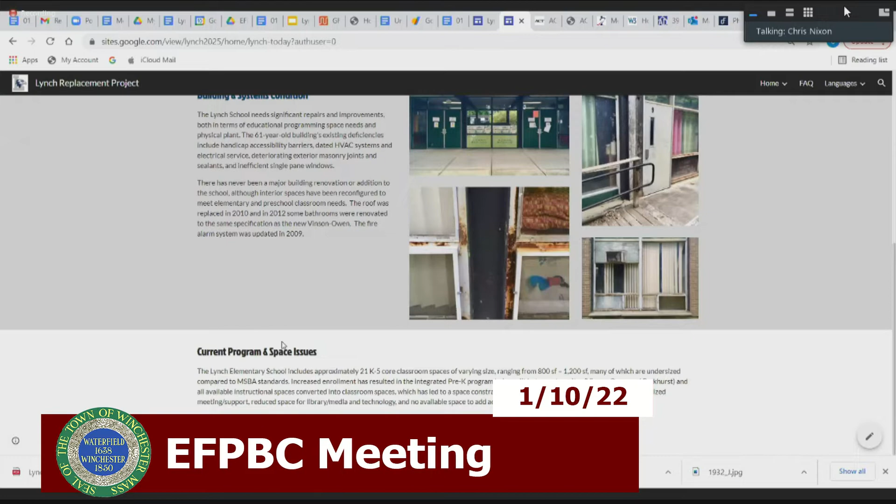We next have a page that describes what Lynch is today. It was designed as a junior high school from the very beginning in 1960. So there's a description of how the current school was intended, its size, and its overall condition with respect to the building and building systems. We also briefly describe some of the program shortcomings we have at Lynch, most importantly because it was never designed as an elementary school to begin with.

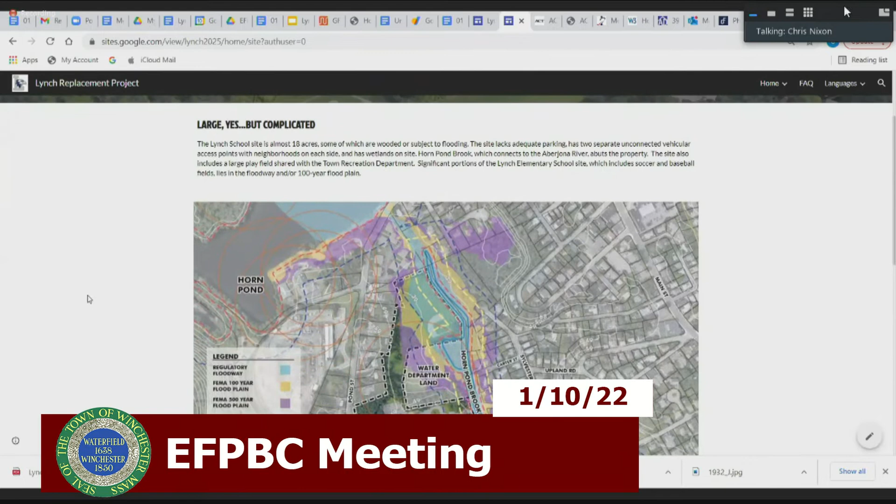This is an interesting page that many people will be interested in—the site. It is a large but complicated site. We're adjacent to Horn Pond Brook, and we have setbacks required because of the floodway, floodplain, and conservation issues and restrictions here.

Really the elephant in the room is this huge chunk of the site that's not ours—this is not school department property. What you see labeled water department land was in fact a well field built in the late 1930s in Winchester and used until the late 1950s, until we submitted an agreement with the MWRA. So it's not our land, but our Tappé design team determined pretty quickly that if it was our land, it might present some unique planning opportunities.

For the public who didn't already know, at the last EFPBC meeting on December 20th, the committee formally requested the school committee explore a land transfer agreement with the select board, under whose authority this land sits today, even though it's an abandoned well field. There are 25 or 26 abandoned drinking water wells on this property. The school committee heard that request, we've discussed it, and we look forward in the next couple of weeks to having that conversation with town management and the select board. That'll be important for us moving forward.

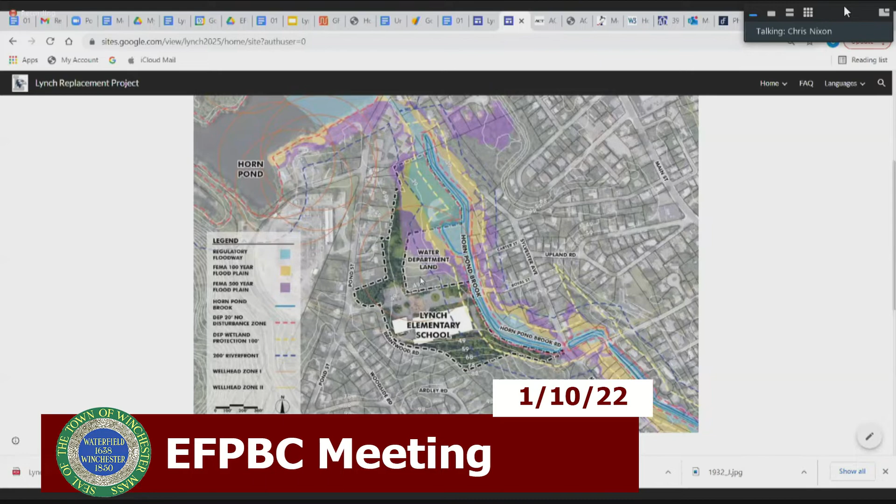If there is ultimately a preferred scheme—and Charlie will certainly dwell on this a bit more in tonight's presentation—for the new Lynch that in any way relies on that land, it needs to be our land by the time the board votes the approved preferred schematic in September. And the final step in making that land transfer involves town meeting, so this is going to be, very quickly, a critical path item that may come before spring town meeting.

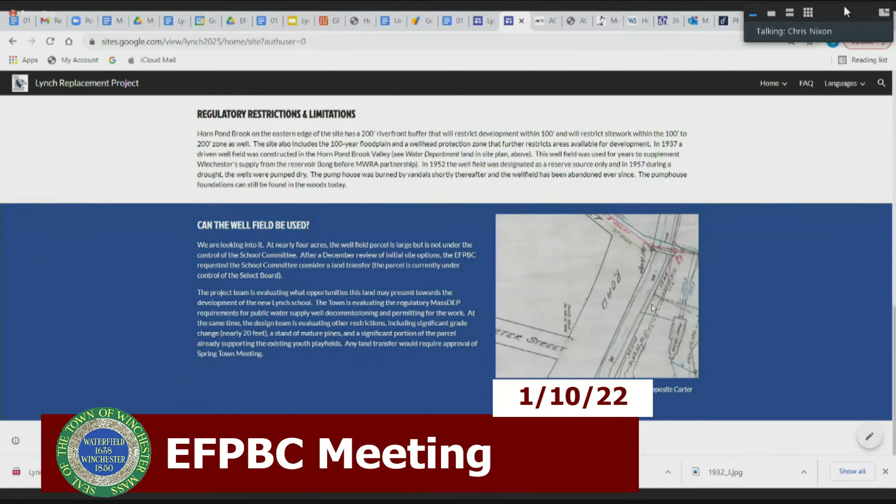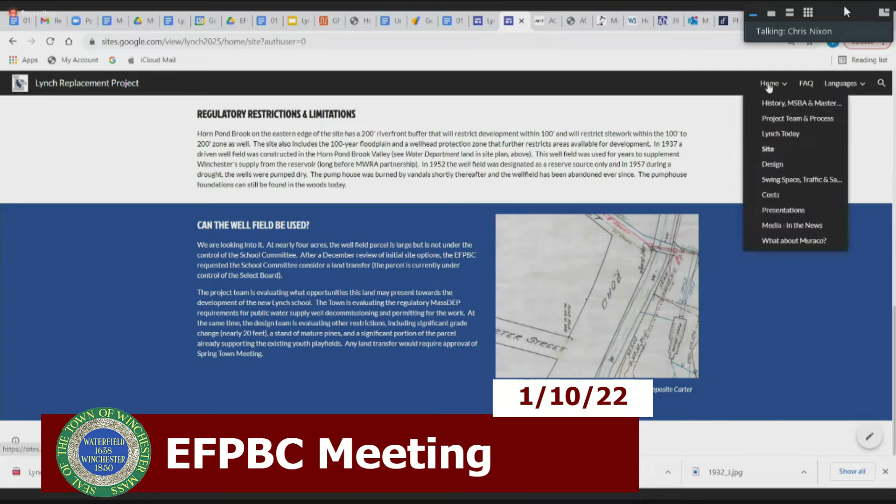For those who live in the Lynch neighborhood and care to go looking for it, the foundation of the old pump house is still there today in the woods. I think we will continue to update this blue field with time when we have more information on how the conversation is going with respect to land transfer.

Then we're going to go to a design page. Obviously there's a lot of information yet to be posted because we're only just coming out of the starting blocks with Tappé. But here you can see a reframing of some of the conceptual design ideals the MSBA is looking for, and some of the key metrics that we'll be evaluating as we consider these different options.

We also described some of the key project goals that were actually published in the project RFP. That includes our recognition of Winchester's climate action plan, adopted back in 2020, and the school committee certainly is expecting a LEED certified building. So that's important to us as well. But look for much more information here on the design page.

There's been much conversation about swing space for the Lynch project. Swing space is just temporary space that accommodates students during construction. Here you see a description of the short and long-term benefits of swing space. We have a little history page here about how swing space has been used on all three of the last major school reconstruction projects. With swing space, we actually moved the students from the Lincoln, Ambrose, and Vinson-Owen schools completely off-site for construction.

And inevitably, we often get questions from the community about what and where is Parkhurst, which comes up in conversation as a potential swing space destination. So there's some history here about that building, as well as some language about our future traffic and safety concerns as the project moves forward.

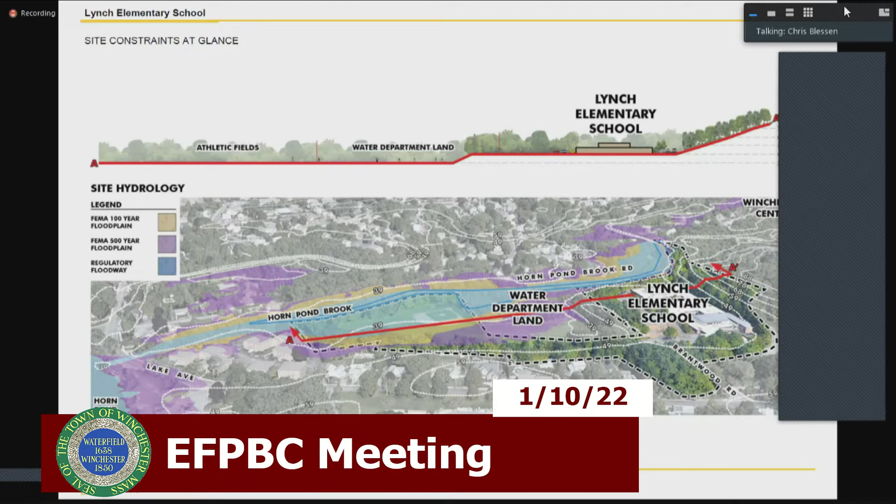And the survey team's out there right now investigating that and trying to get some more info to add to the PDP submission. So the first option was the renovation option here.

What we've added to these is primarily in the middle column, between the image and the description on the right. On the ones we carried forward from the last meeting, we started to add a first floor concept idea where you can see what the first floor is doing. Right now isn't the critical moment to talk heavily through architecture or arrangement, as we've just started to touch the iceberg on those ideas, and we'll have more to discuss at the next meeting in terms of education and how these buildings, these different schemes, lay out. But for now, we're talking about the first floor concept and how that builds, because it has implications for the grade configuration, which is the second note below the floor concept.

So in reality, the renovation scheme, as one might expect, produces no change to how the building is configured currently.

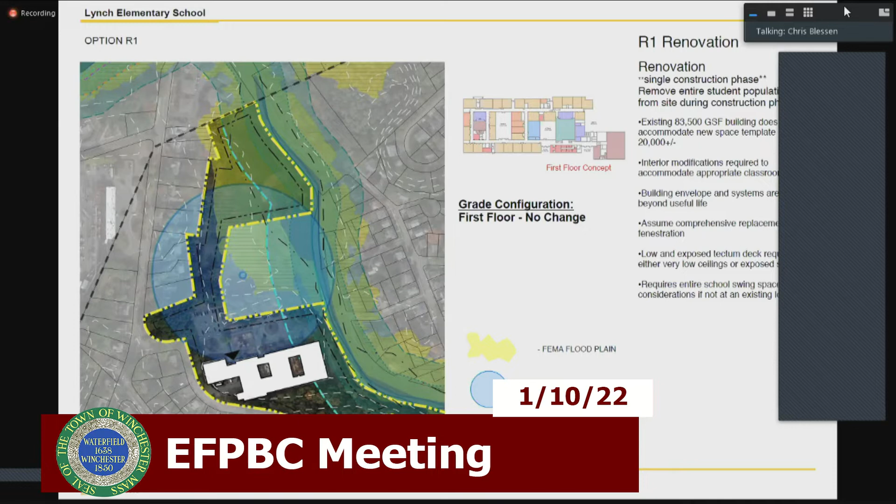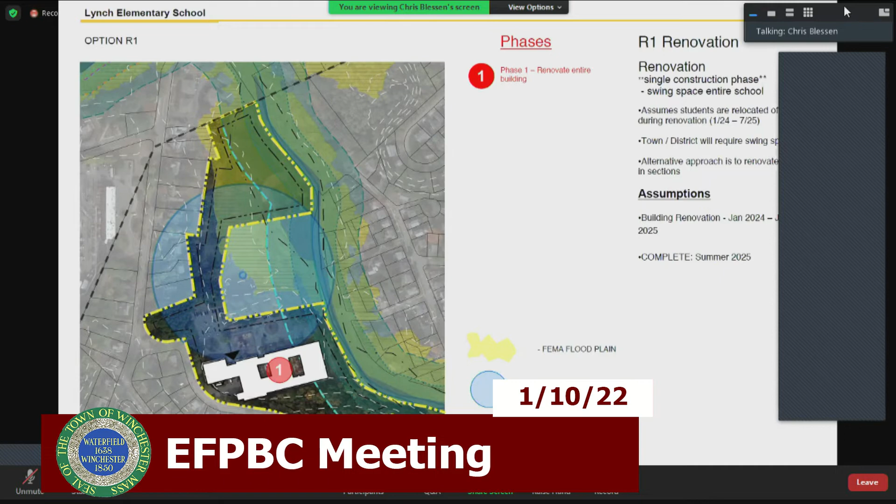And so this is that option, and I'll keep going here and show you the site plan, which is going to be the same. Remember that this project requires it be done all in one phase, which means this entire school would be in swing space for the entire duration of construction. And then there's that 3D perspective.

So this was AR1, the addition renovation, and this is the one we had previously determined would drop off the list. I think it was mostly because of the vast disruption to the building and to the simultaneous construction and use of the building. It also disrupts the site a little bit more than AR2. So during construction, we have taken this off the plan.

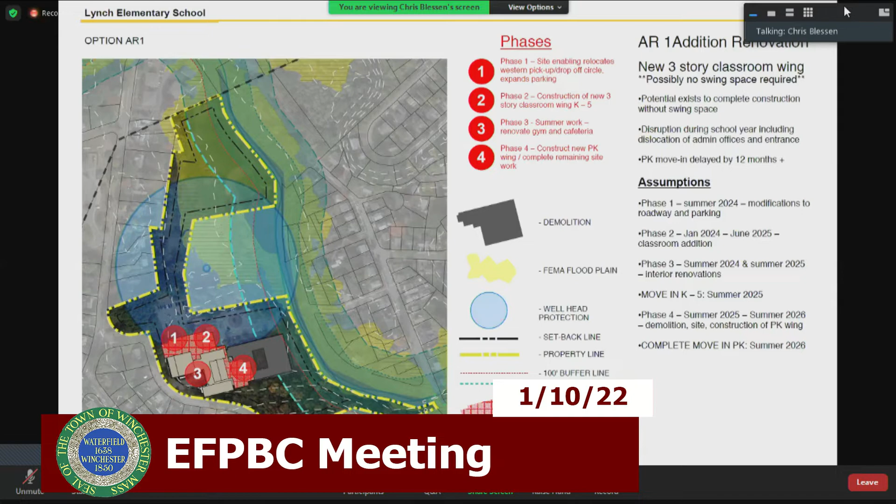Can I stop you just for a second? There's a gray box on the right-hand side of the screen. I don't know whether you can remove it or not, but it's blocking some of the text. Is that helpful? It's still there for me. Oh, it's gone. There's one at the bottom too. Let me see if I can get rid of that. These are the controls for Zoom. I don't know, I could move it. I'm afraid to click buttons there, so I'll probably leave the meeting. That is substantially out of the way though. What you just did was really helpful. Okay, yeah, okay.

Chris, can you also clarify for folks watching when we see notes like possibly no swing space required, that was an option. I think there were two others like that. Those are not 2025 completions, those were options that would take an entire other year. I think that was something the EFPBC wasn't really interested in, going out to 2026. 2025 is a goal we all want to pull for. Right, correct. So you'll notice the duration extends if we don't do swing space or get aggressive on how we plan these things out.

Okay, so I'm sorry, let me go back here. Yeah, okay, so AR2 is where we are now.

This is another one where we were contemplating that swing space is required, but remember the MSBA requires that we carry forward an addition renovation option. Out of the two addition renovation options we moved forward, this is the one that seemed more advantageous than the other, mostly because it's only adding the pre-K wing out to the north of the building, sort of where the playground is right now. So that's a smaller addition, but then a major renovation to the rest of the building. It's a little more tidy in terms of how it would work and doesn't have to be a ton of phases, whereas AR1 had a bunch of phases to be able to complete and swing kids around.

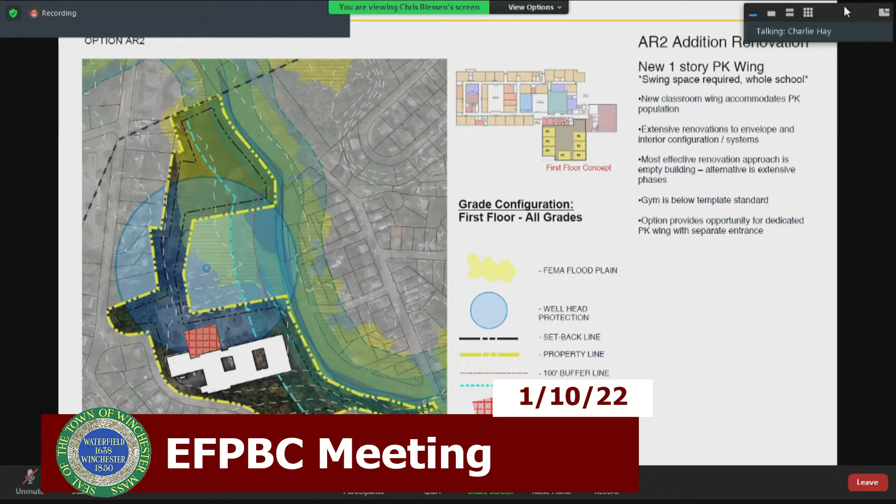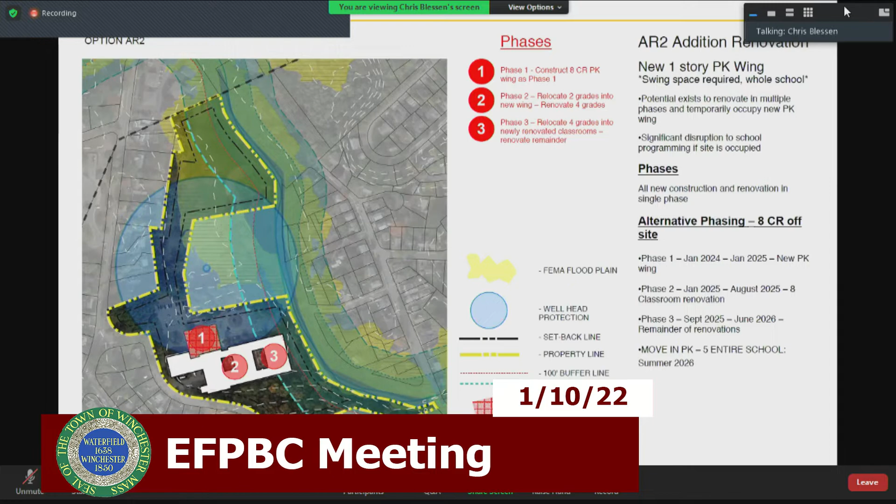And then the phases are as following. As Chris Nixon denoted, you'd be able to move some kids in 2025, but most of it's going to come back in 2026 when the new building would be complete. So there is some overlapping work here. There's some nuance to phasing the kids in and out of classrooms and swing space, but this would be considered a fairly significant disruption to school if the site is still occupied.

One of the concerns with this option is the landscape architect felt buses would be better served coming in from the Hornbrook Road side, Horn Pond Brook Road, which could be a concern because that's not the way it is now. Right now they come in from Brentwood Road. So that would be something we'd need to talk about in greater detail. That was simply because you get a longer queue from the east. However, that may not be a desirable outcome in terms of traffic. So we're not saying we're unaware that this has changed in this plan—we did talk about it, but wanted to make the point that these topics may be on the table depending on what option is being discussed.

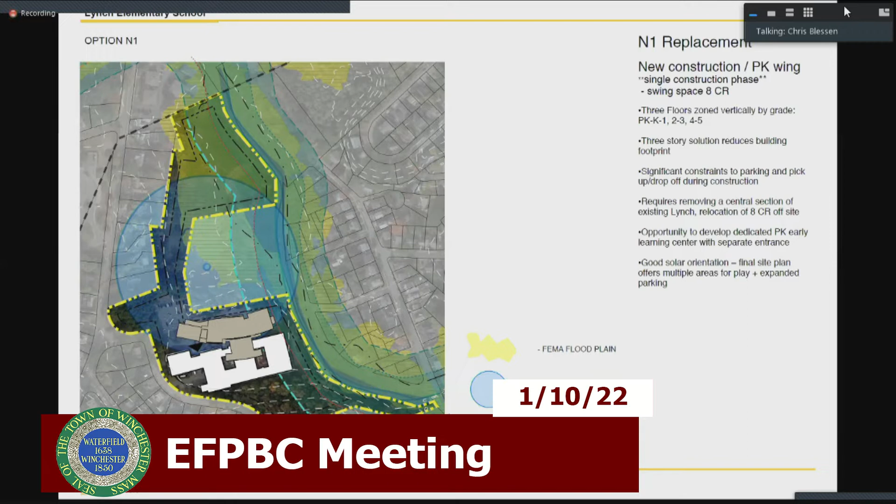And this was the phasing assumptions around that. As I said, point one just kind of shifts some of the phasing to be opposite, and when that wing gets built out, the pre-K wing gets built out into the existing building.

The N2 replacement scheme is one that we did carry forward from the last meeting. The important thing to note here, you can see in the graphic—both on the site plan and the first floor concept—is that this proposal would be a school that has pre-K and K on the first floor, along with other major building spaces like the gym and the cafe, some of the back of house and kitchen, cafe being cafeteria, and then the administration. So the concept is that it would be broken out in terms of pre-K and K on the first floor.

The second floor would be first and second grade, then the third floor would be third, fourth, and fifth grade. The decision points around this iteration of choices is really thinking through grade configuration and applying some educational planning principles to these options.

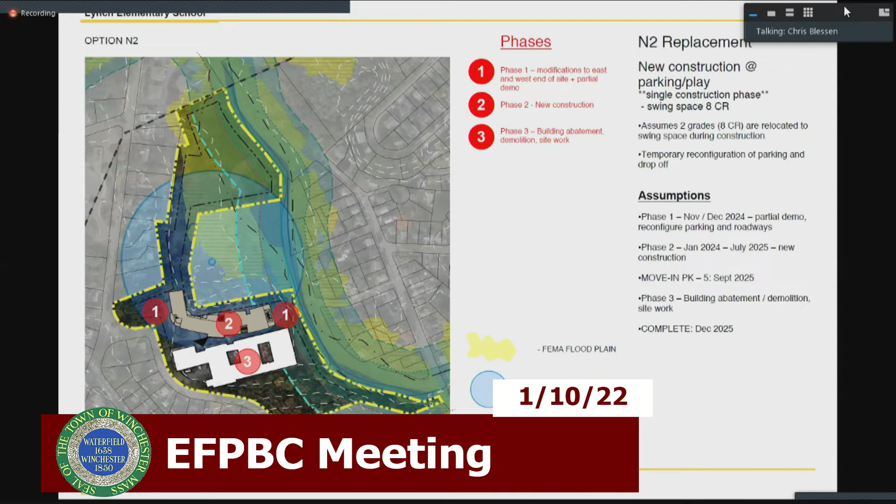We've tried to show options that have various responses to that, and that's what you're seeing here in this scheme. The phasing on this one would be a little bit more simplified, with a completion date in December 2025, which was the goal for the Lynch 2025 project you saw on the website. So this would basically be: build some enabling, then build a new school, move the kids in, and then demolish the existing school after that.

I think the hallmark of this option ends up being this sort of center green space that radiates out from the middle of the school and creates a safe learning and play zone on the south side. So you get good solar orientation and daylight, and the orientation of this site responds in an arc-like fashion to the movement of the sun, which is a better strategy for the energy efficiency of the building. This scheme has strong connections to the outdoor areas and nature, and that's really what's driving a lot of the planning and preliminary concepts around it.

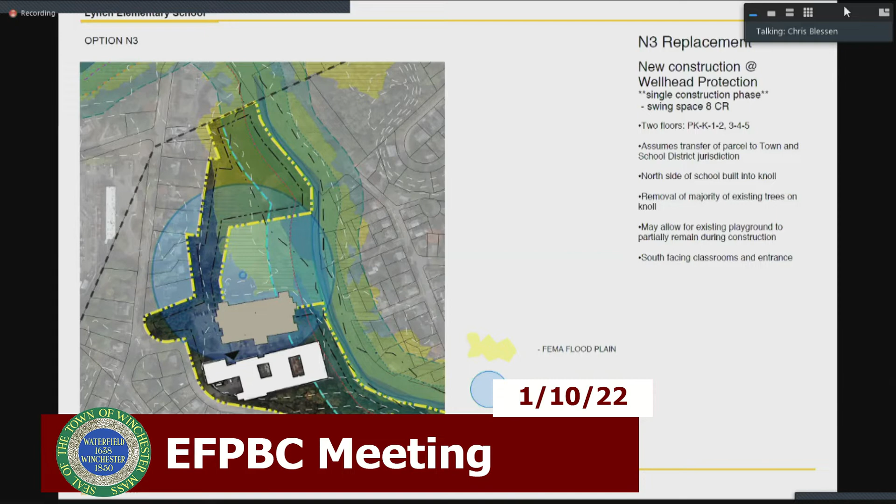Option N3 was a 2-story building. We did not bring option N3 forward from the last meeting because I think it takes up a lot of space on the north side of the school, and it's a two-story building. I think the committee favored the same kind of looking option, but just as a replacement school on top of the existing Lynch. So this option, N4, is one that we carried forward as the two-story option, which would require the entire school moving off-site and having one single construction phase to do the whole thing at once.

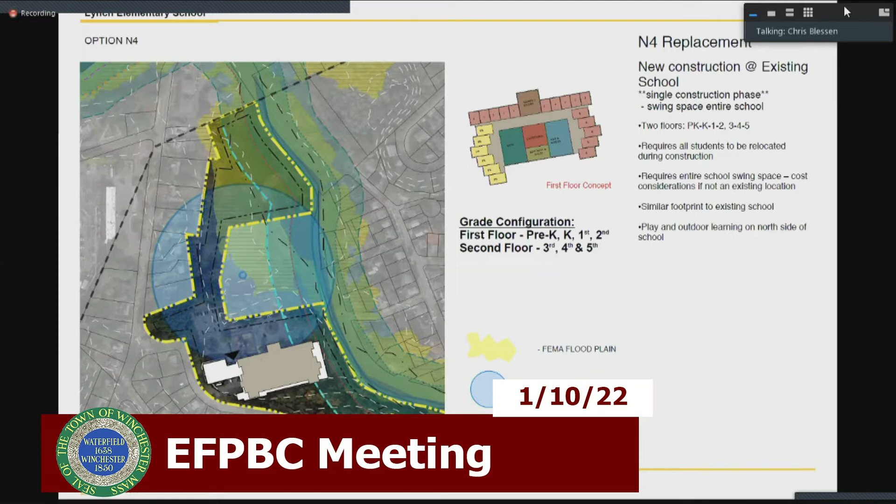So what we're seeing with this option is that you might do pre-K, K, first grade, and second grade on the first floor, and then on the second floor have third, fourth, and fifth. So that's the breakout of this option, again a two-story building, done really cleanly, with a little bit of an earlier completion date because you're able to get at everything all at once.

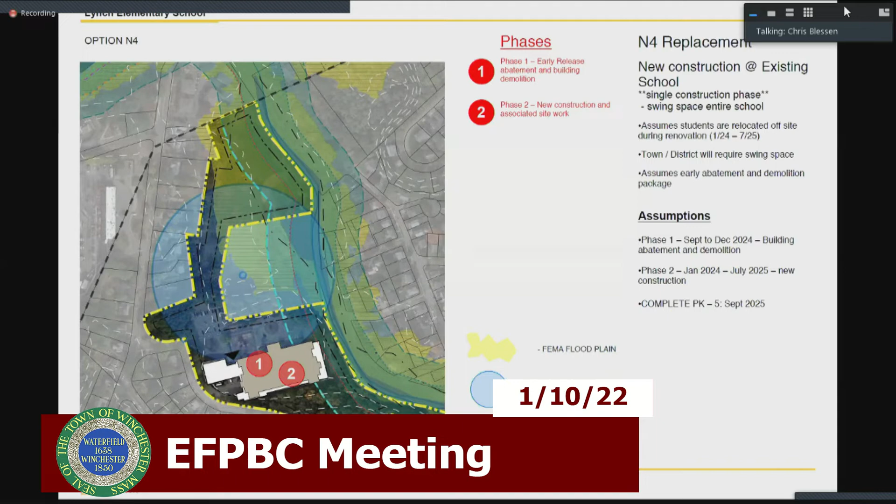And the massing of that might look like something like this at the end of the day. The entry would be more north facing instead of south facing, and most of the classrooms are actually going to be on the east and west facades, with some exposure on the north side. So it's not the most sustainably focused option, because you're backing yourself up to the woods, which are on the south side.

N5 was a replacement school, again 3 stories, similar to the previous option. This one has an arc related to responding to the solar orientation. But what we did was move the gym more inboard and have it extend out into that wellhead property, taking up some of the topography there where there's a slight bump that then goes back down. So some of this gym could be a little bit buried, and you don't always need windows on the bottom parts of a gym anyway. So we can use the building to retain earth in some ways. The grade configuration we were thinking of on this one was that we could achieve pre-K on the first floor.

The big difference between this one and the previous one was putting 3 grades on the second floor—first, second, third—and 2 grades on the third floor, fourth and fifth. That grade grouping may be more advantageous, and the way this building spans out allows us to get a good clean arc of space on the second floor for 3 grades to fit above what is single story space below.

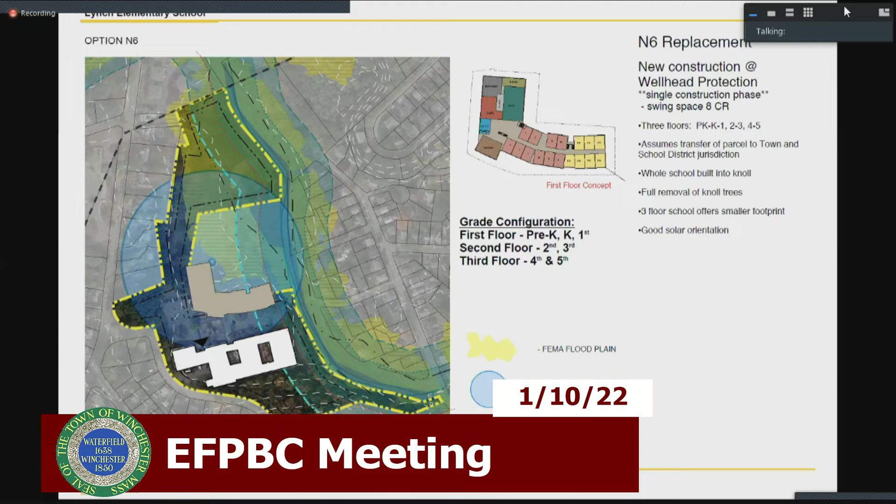The big concept here is putting the 3 grades on the first floor instead of the other two options. So you have one option with the 3 grades on the 3rd floor, one with them on the 2nd floor, and this one with them on the 1st floor—pre-K, K, and 1st grade on the 1st floor, 2nd and 3rd on the 2nd floor, and 4th and 5th on the 3rd floor.

This would have a similar completion date at the end of 2025 as the others.

If you look at the site plan closely, you can tell this is scooted up about as far north as we can get to create space between the existing building and the construction zone. But we can't go further into that yellow underlay area, because that's the velocity zone for the pond—the flood zone from the pond to the north—so we have to stay out of that.

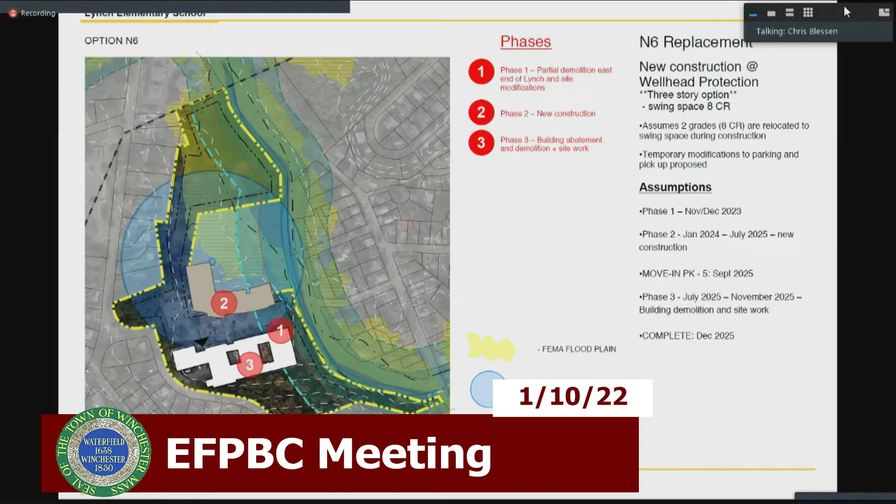The site plan follows similar concepts to what you've seen before, where we're trying to extend this green learning space from north to south, with the site essentially bisected between the two access zones from the separate neighborhoods on the east and west.

The building is taking on a form to accept the green bridge from the north all the way through to some learning space in the green play area on the south, then through the building to the north learning space as it moves more into the nature landscapes. This site concept is similar to the others but has a little different queuing and bus approach—I think the bus approach is on the west side for this one.

And this scheme pushes back more into the north and the wellhead site. But as you can see here, it gives a lot of space between new construction and existing school, which could help with the phasing of the project. But also from the neighborhood perspective, I think it would be a little bit more up in the trees, should we be able to protect a lot of those and keep them, which kind of would shield the large massing.

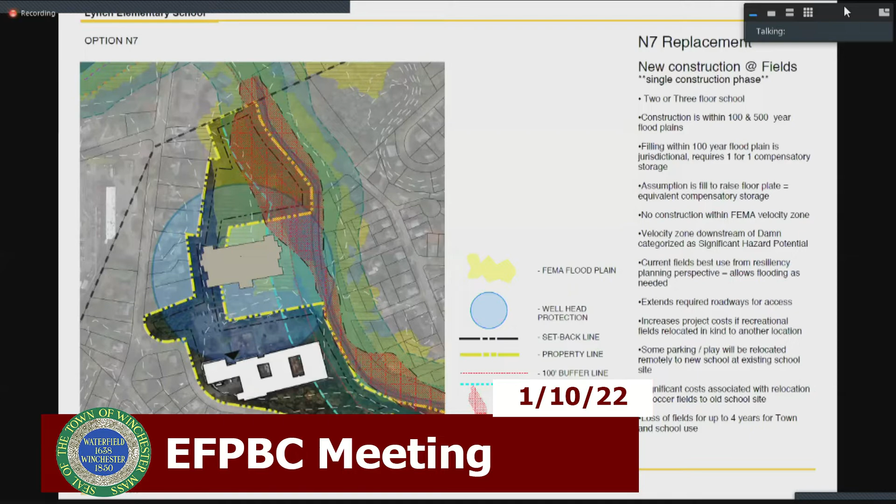The list of constraints is exhaustive on the right. So in a nutshell, here's the options that we've carried forward from the last meeting, again, as massing models, and I'll just kind of sort through those so you can see them changing over time and how they fit. And then again, to remind you of the ones that we had X'd off last time.

And I think that's all I have. All right, thank you very much.

So we're going to open up now to the EFPBC's feedback and questions. And do we want to look at each one or start with each one and go forward from there?

Or do we? Jay, I just had a quick point of information that applied almost to everything that Charlie and Chris just shared. Can I just ask them to take a moment and share for the general public, when schemes that you show are some distance from the existing school, our expectation is some measure of swing space is still required. Can you talk a little bit about the realities of excavation, earth retention, construction equipment, laydown area, etc.? Obviously I think we understand when a footprint is on top of the existing Lynch, but what about some of the others that Chris just shared with us? That might be helpful for people to understand for context.

So the replacement buildings that are closer to the existing Lynch, you may be able to build next to the Lynch, but we're building on top of existing play area. We're building on top of existing pickup and drop off. And so the fact of the matter is, it would be extremely difficult to run a school, run the Lynch, having displaced a large part of your pickup and drop off zones and play areas.

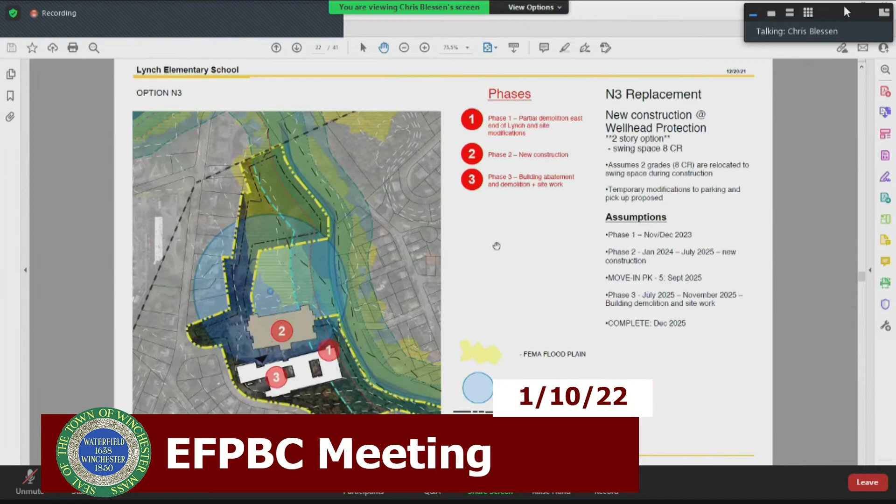This site gets - let's just say if you went into... I'll zoom in here, you can see that portion of the building is there. And I can highlight it a little bit more.

Yeah, I understand the problems, but I guess when I saw many of your floor plans, it looked like the gym was doing double duty as an auditorium in all cases.

Right. I think the current thinking at the moment - again, we haven't taken too deep of a dive into the educational side of it, but in the programming, we'll have some better updates about the visioning and programming exercises we did over multiple days. It seemed the ideal scenario is placing a stage between the gym and the cafeteria, so you could have two different types of spaces that serve as a performing space with audience - the larger space being the gym, but maybe a slightly smaller version being the cafeteria. That's why we've been showing it the way we have.

Yeah, but it could play out a whole number of ways. I guess my view would be that'd be money well spent to provide the flexibility of having both the auditorium and the gym functioning at the same time. That's money I would spend, but it may not be money others would spend. But rest assured, the proposed gym is actually larger than the pre-existing gym, so we're not reducing the size of the gym.

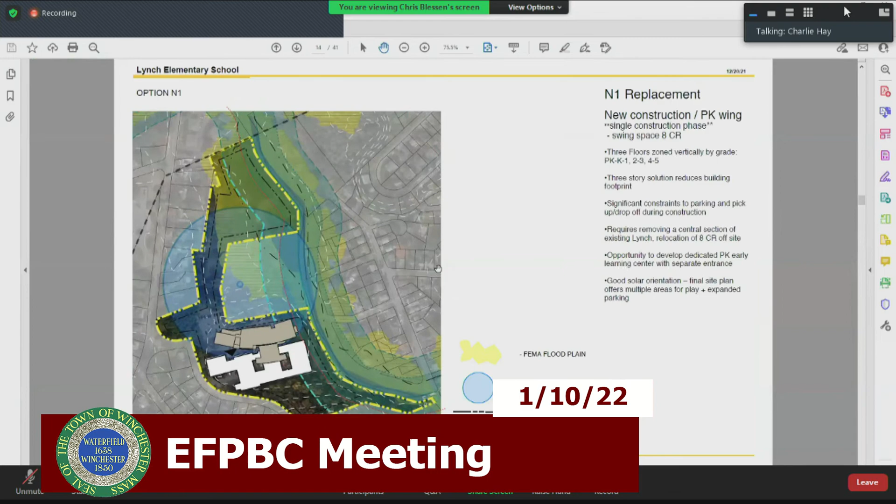All right, staying on schedule, can we open up to some questions? Chris, have you received any questions we can answer?

Yeah, we have. Krista Luce, actually on this very subject, circulation, asks: do we have to keep both Brantwood and Royal Street entrances open? It seems like we might be able to consolidate the parking areas if we could only enter from one point.

I would just offer, I think this is a question about site access that the design team is really going to want to talk to the Lynch community about specifically. I think there were some strong opinions years ago—I've been a Lynch preschool dad twice, many moons ago, my first Lynch preschooler is about to turn 21 in a few weeks. But even back then, I understood the Lynch community was concerned about that connectivity, the potential for it to be a pass-through. Years have gone by, times have changed, but it's certainly an important point to talk to the community about.

But Charlie or Chris, do we have to keep both entrances open? Seems like we might be able to consolidate the parking areas if we could only enter from one point. Could you speak to that from a design point of view, recognizing that emergency responders have to get at least 300 degrees around a building one way or the other? What are your thoughts?

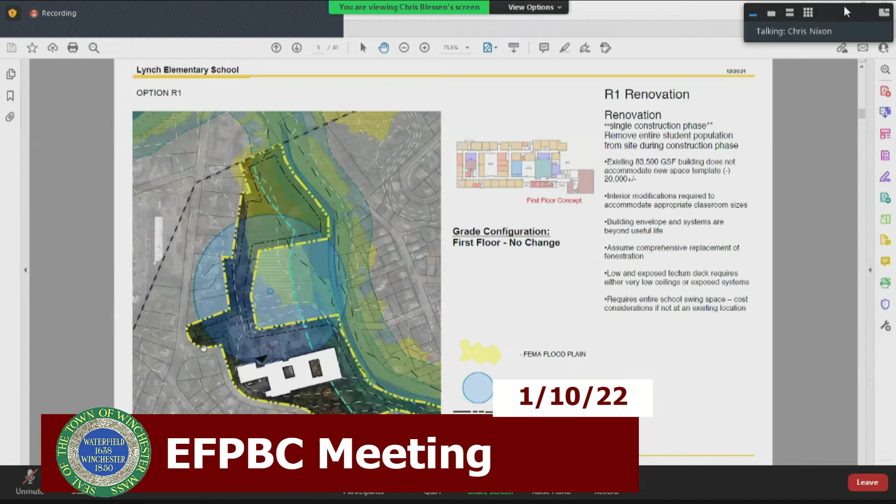The play areas in some of the plans seem awkwardly and perhaps dangerously placed between and close to roadways, with concern about ball play being stressful, difficult, or impossible. Can you talk a little more about that — maybe Chris wants to bring up a plan. Certainly this is pretty conceptual, but it's a good observation. How might Charlie or Chris react to that?

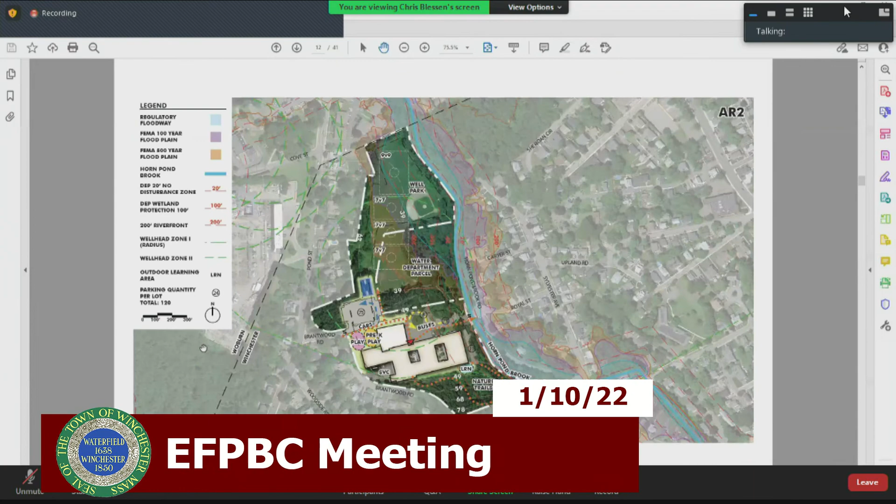Let me go to... I think that blue item, by the way, that's a basketball court, right? Yeah, it looks like an H in plan, but it's a basketball court. So not Swim Winchester's pool. Yeah, you can see it up there, but let's zoom out one level here.

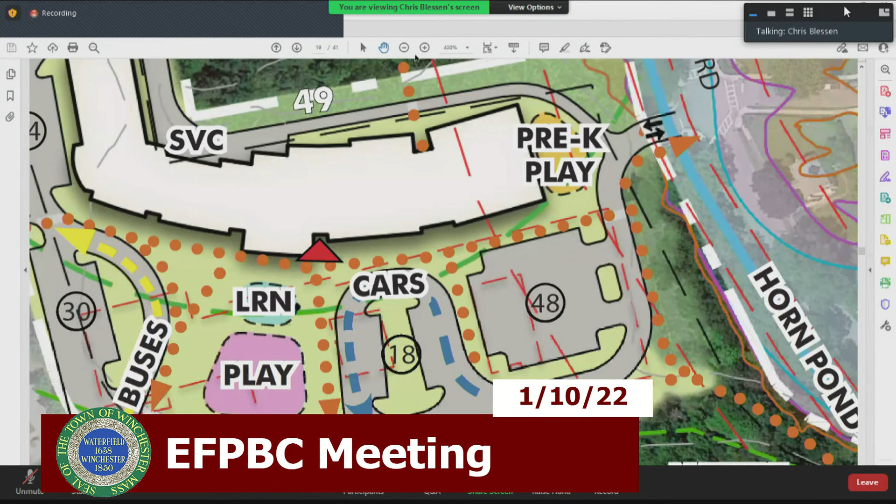I think the simple way to answer this is that these are really first-pass concepts of what could be happening. The thing to take away is that we want to strive for, as Colleen noted, some connection to the outdoors. Maybe we haven't arrived there yet, but we also haven't spent weeks and months wrestling with the site plans for very specific things. So the notion of putting play out here, especially in this option, you've got a lot of space between the roadways and the car pathways. On this one, there are a couple of others that are a bit more narrow, and we acknowledge that. But I think you'd find we're not going to stick play somewhere that's not safe—we'd try to get creative about different ways to make safe play on sites. It's just something you have to have for an elementary school.

That would be my first response. The second response is that while play is in session for the school—if this is not a through road, and it's just a road primarily used for pickup, drop off, and parking—there's actually not a lot of vehicular activity happening. There's intermittent cars for pickup or drop off, but during the school day when there's play, there's far less traffic. So after school hours, or weekends, when traffic is moving and heavy, we'd really need to consider those. But there's been a lot of precedent for schools that have play around major roadways, cars, parking lots, or drop-offs that is fairly safe. Some of those are projects we've done, and some are not, but we've seen the results.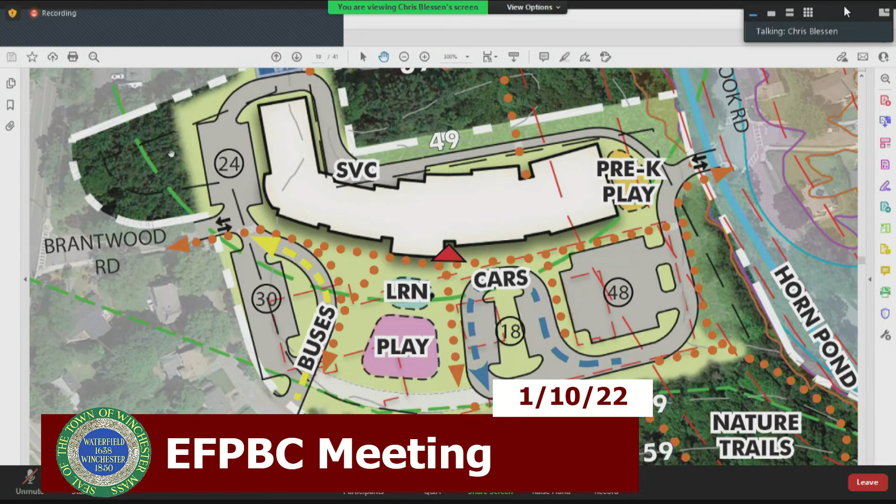From the west? From the west. So that's over on this side somewhere? Oh, forgive me, yeah, Brantwood Road. The only thing there is a west, and I thought east. My mistake, thank you. That's a hill, and it's also heavily wooded.

Oh, down there. Well, this option in particular shows a new curb cut there to accommodate buses. So that is an option. However, it does bring more traffic onto Brantwood Road, so we have it shown both ways. Again, part of the intent is ultimately to have different options, not necessarily recommended or not recommended, but to bring up topics to be discussed.

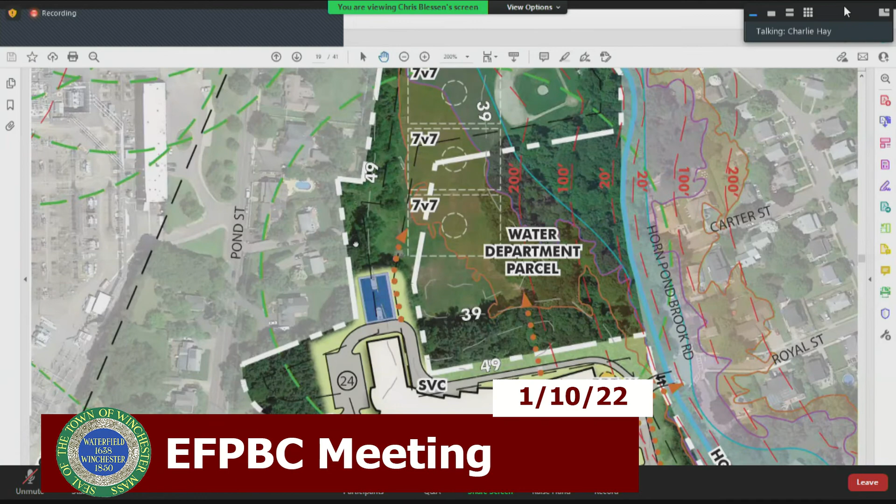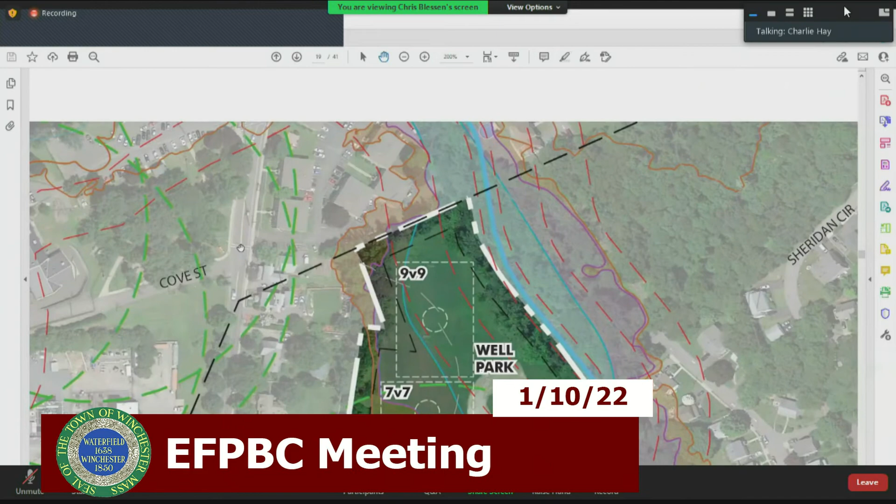But if you look at some of the other options on the Brantwood Road sides, there's a loop, and you're talking about way up there. No, I'm just looking, Charlie. I don't think there's any other places to access along that side, so that would have to be significant cost from Brantwood somewhere. Right, so my point was that this one does show a new curb cut further south on Brantwood as a way of using Brantwood for buses to loop around.

Well, I think, Charlie, that curb cut is already there for access to the backside, it's there for service only. Yeah, so the garbage truck goes back there, food service goes back there. Right. Okay.

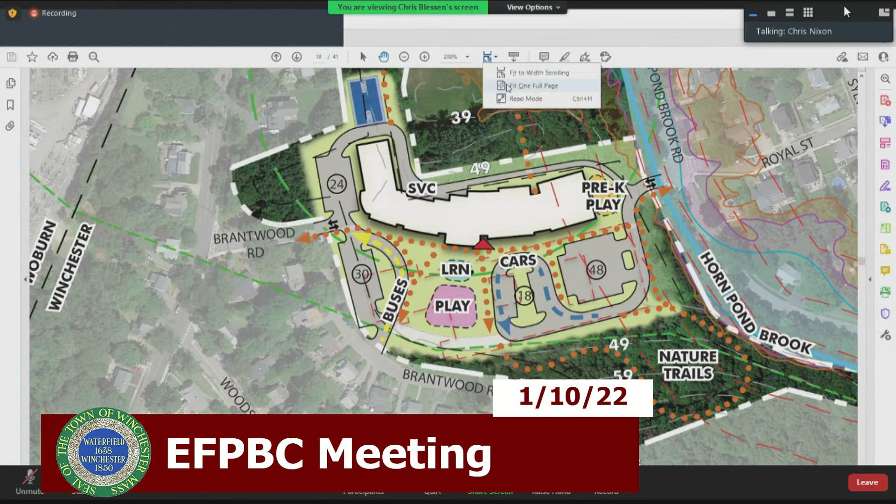Neil, if you've got other questions on circulation, if we didn't answer that, just keep plugging away with questions. Tom Hopcroft writes: in the N2, N5, and N6 options, assuming the school department picks up the well field transfer we talked about earlier, will we have landscaped areas through the currently unusable well field site to the fields? Right now there's a thicket just where Chris's cursor was. We have a stand of mature trees, they look like eastern white pines, below that number 39 on the topographic map. But then to the right this changes quickly into a thicket of what looks like Norway maples, not eastern white pine. So Tom's question is, will we have landscaped areas through the currently unusable well field site to the fields? In other words, a connection into the play fields, I think.

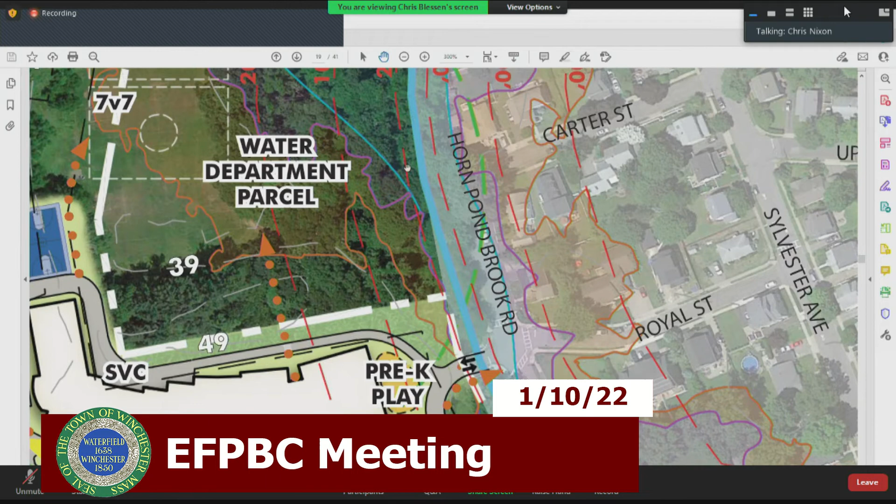Right, so you can see this orange arrow isn't really showing much design, but telling you we want to try to figure out a way to make pathways or boardwalks through the woods to the play fields.

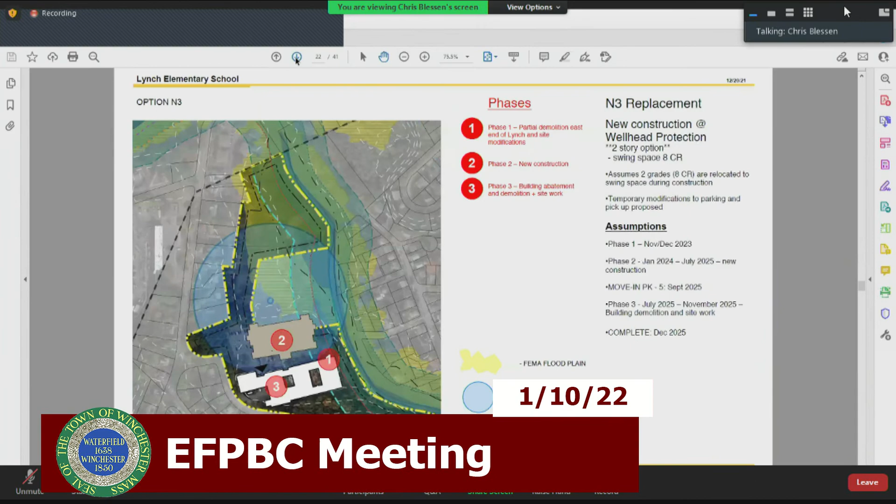I think we showed a different option of that on one of these other ones. Let me see if I can find it. Might have been...

Yeah, so this one kind of, the further north we move, the more of the knoll we're developing, right? So part of the implication of moving the building north into that parcel is the opportunity to further develop it and to further create connections between the northern soccer fields and the school and then the southern site. So it's actually one of the really interesting implications. Not only does it benefit moving away from the existing building during construction, which we talked about, but it offers that opportunity potentially to develop the north side of that site that's still below the soccer fields as outdoor play, outdoor learning.

Potentially if there's concerns about having a lot of play next to roadways, a place that's farther away from road, more isolated from roadways for some of the play. So I think there's a lot of interesting possibilities related to doing that. We're still in a position where we believe that as the designer, we may be charged with not touching that property, right? No one's told us we can do this yet. However, if we could, there are some interesting possibilities relative to that part of the site. They could really begin to unify north to south, unify a large parcel of land, but one that is obviously completely bifurcated by this parcel in the middle of it.

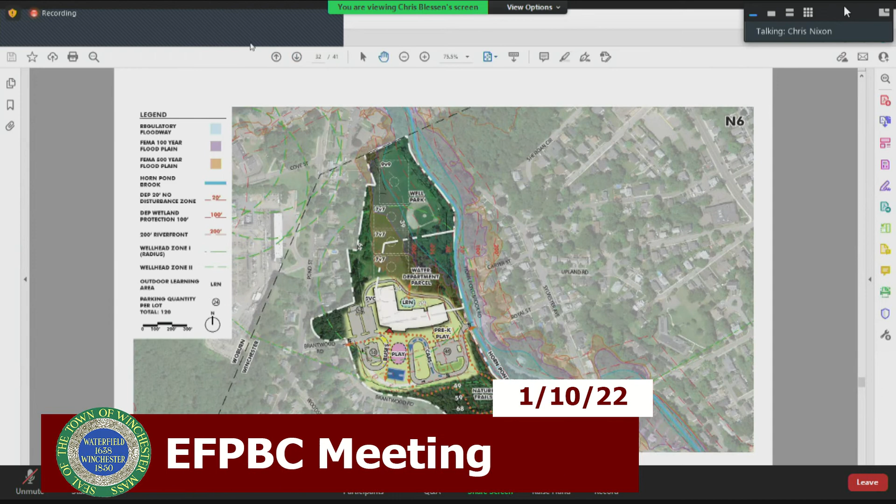As Vivian and Charlie noted at the beginning of the meeting, we're not really making any decisions tonight. We're submitting to the MSBA really all the schemes that Tappé has generated, including the ones that have been sort of taken off the table and those that are still open. We're not making any sort of preferential selection. I think a lot more conversation lies ahead of us.

At the next meeting on the 24th, we're looking for a report on the visioning sessions. There were 3 visioning sessions held with several of the team's consultants and administration, teacher, staff, and some Lynch parents. And we may also have a conversation about some of the organizational strategies that could impact one solution over another. So, for instance, what does Dr. Hackett think, based on his input from others, about organizing a K1, a 2-3, a 4-5?

Does it make sense? Where would pre-K go? Does one of the schemes Charlie showed tonight, I think, a 3-floor scheme had just grades 4 and 5 on top? So I think the committee is going to hear more on the 24th about some of the organizational preferences that might come from administration and from the superintendent. And that may help the EFPBC continue to narrow the list a little bit. So I hope that answers that question. If anybody else wants to jump in on Fritzy's question.

Mr. Foley did fire back, so we have one more question. Neil says, with respect to that circulation question, he's referring directly adjacent to Brantwood, just to its north where there's a small wood lot. So I think you were talking about that sort of thicket, right? When you just turn in off Pond Street, there's that stand of trees on the left. This might decouple the entry from the residential street. So I do think you've got some schemes you showed tonight that looked at developing that parcel, in one way, shape, or form. And that's kind of part of the canvas you're working with.